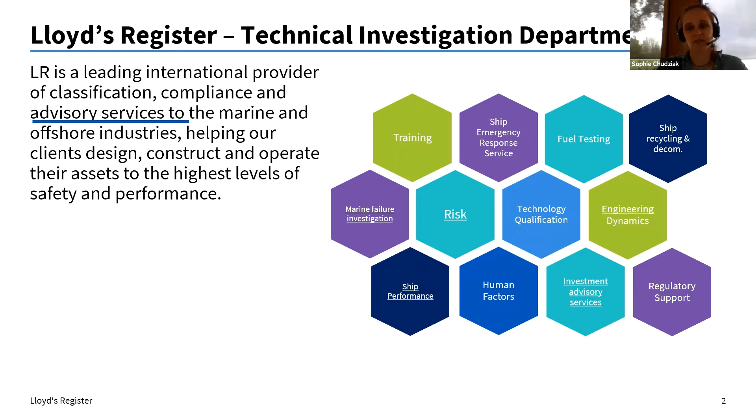I'd just like to introduce the department I work in. Most of our work is dedicated to advisory services, which covers a wide range of fields and competencies. Some of them are underlined here. It includes failure investigation, risk assessment, naval architecture analysis, ship performance assessment, and others.

Tonight, I will first walk you through the overall project. I will show you the equipment installation on the shaft line, some of the post-processing steps that we carried out, and the results we got. I will talk a bit about the health and safety challenges we encountered, and finally, some overall challenges during this project. I would like to add a small disclaimer that I'm not an expert. My aim is to share a project I was involved with, and I found really exciting and interesting, so I hope you'll find it too.

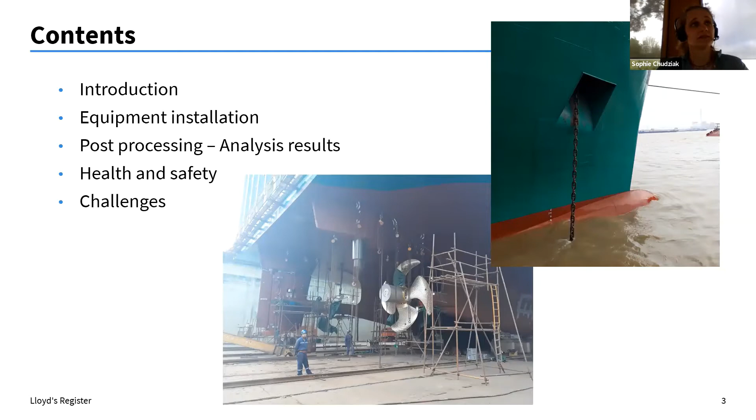So let's dive into the actual project. 2 RoRo vessels were being built in China for trade in Australia and Tasmania. The ships were about 200 meters long and 30 meters wide. They are twin screw vessels fitted with 2 conventional shafts, each driving a 4-bladed controllable pitch propeller. On each shaft line, a direct drive 2-stroke engine was fitted, and there was also a shaft generator.

A numerical analysis carried out by the shaft line designer suggested elevated moment and forces at the propeller, hydrodynamic moment and forces. As this was a new design and the only dry dock suitable for these vessels was quite far away, any failure would have been very costly for the owners. So they decided they wanted to carry out in situ measurements to de-risk the operation of these vessels. Therefore, TID was contracted to measure the propulsion dynamic forces.

They started the project and planning began to take place, which was coordinated by a TID senior engineer. We were actually contracted by the shipyard rather than the owner. And there were two sisters in the series. TID attended both vessels for static shaft line measurement, and we conducted dynamic measurement on the first ship of class. I will only present tonight the dynamic measurement aspect.

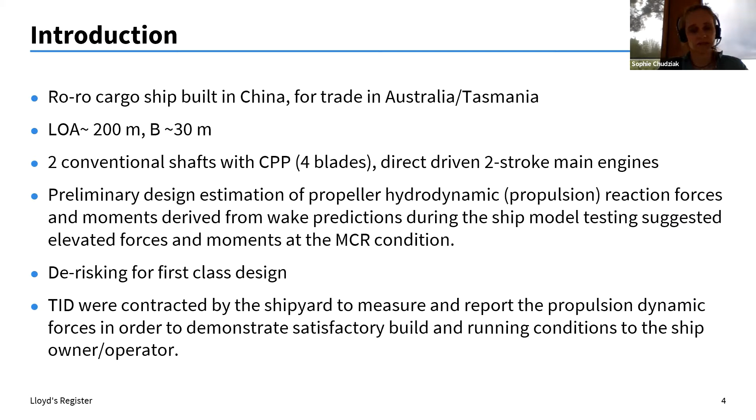As you may imagine, this was quite a complex project that required a lot of coordination and involvement of a number of colleagues. Originally, the project was won through TID Asia. We had an office in Shanghai. Two hydrodynamic specialists from TID carried out some numerical analysis and modeling.

A senior engineer wrote the proposal for the on-site attendance. Another senior engineer was the overall project coordinator. The technical lead carried out most of the analysis and was also involved in the installation, led the installation.

Two instrumentation specialists tested the equipment in our laboratory in Southampton, tested, prepared, and looked after the logistics. Another instrumentation specialist looked after the underwater telemetry and also the on-site installation of that part.

Two engineers carried out some other part of the on-site installation, the data collection during the sea trials, and some of the analysis after the trials. We also had support from administration, from TID in the UK and in Asia, the finance people, some local surveyors that would help us with the shipyard, and other people that I would forget to mention, probably.

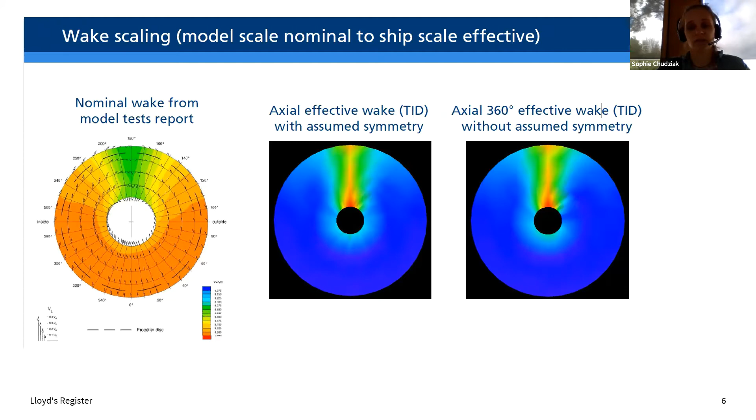I'm going to show you a basic overview of the installation and then go into more detail. We installed strain gauges to assess propeller shaft bending and shear strain adjacent to the propeller flange. This would then be used to derive the propeller hydrodynamic moments and forces. The underwater telemetry was fitted under the rope guard, and the battery pack was dormant for 3 months underwater, and it was then turned on before the sea trials.

Proximity transducers were built in the stern tubes, 4 at the aft end of the aft stern tube bearing, another 4 at the forward end of the aft stern tube bearing, 2 forward and 2 aft of the forward stern tube bearing, so that would be 12 in total, monitoring the radial displacement of the shaft in all conditions.

Inboard, we installed strain gauges to measure bending strain in the inboard spans between the bearings. We also measured the torsional shear strain and axial strain to derive torque and thrust. We measured the axial displacement at the main engine output flange. We also measured the rudder angle, the pitch of the propeller blade, the shaft RPM.

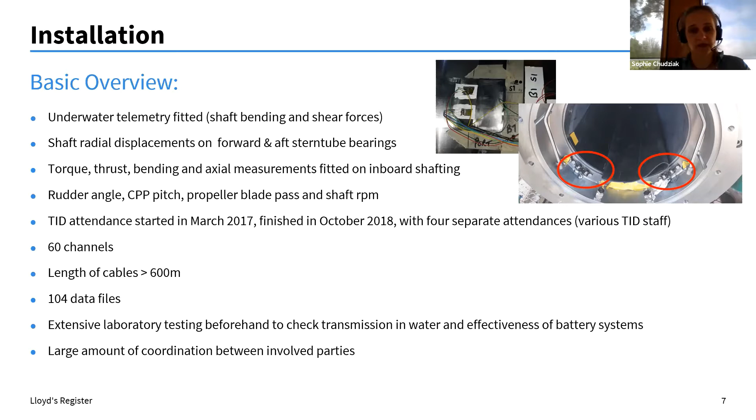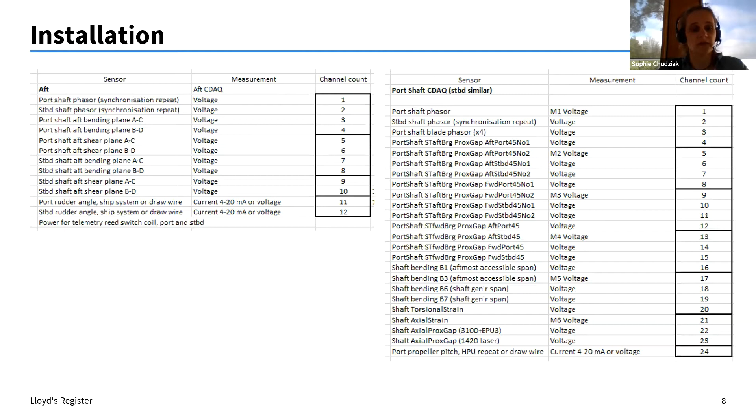This is a list of the channels that were being monitored. We instrumented both port and starboard shafts. The installation was identical. On the left are the channels that were installed, came back to the steering gear compartment. 12 channels coming back there. And we had 24 channels on port side, 24 channels on starboard side that were all brought into a National Instruments data acquisition chassis.

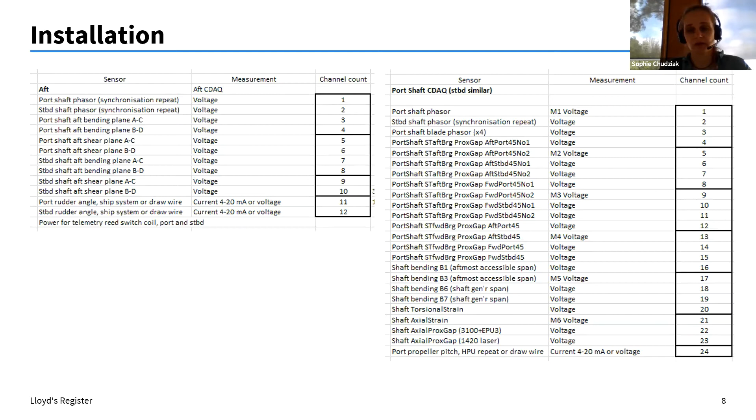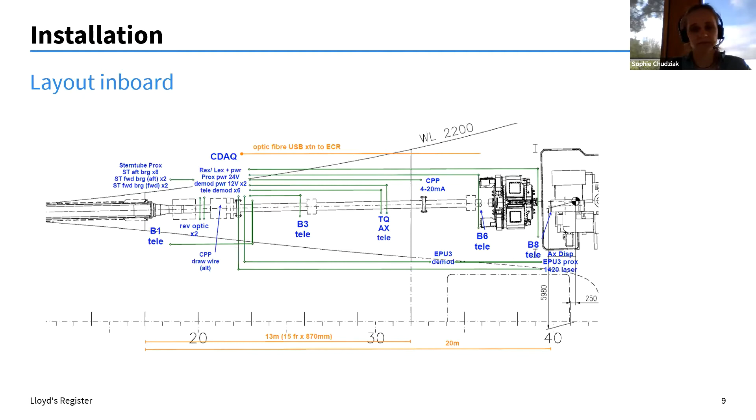This is the layout for the whole installation. Identical port and starboard, some channels in the steering gear compartment, and they were all synchronized with each other and brought back to a data acquisition laptop located by the engine control room.

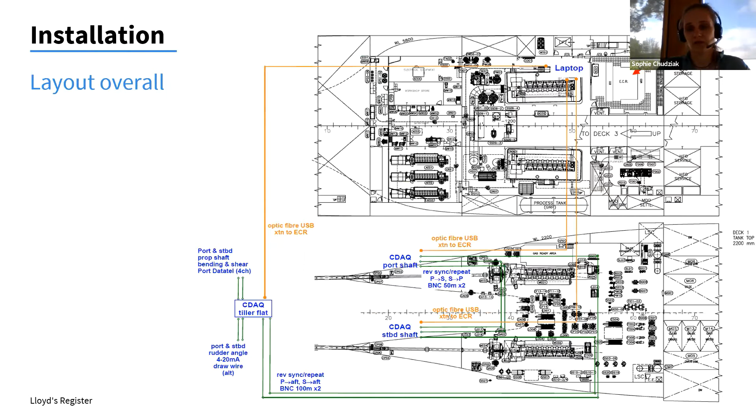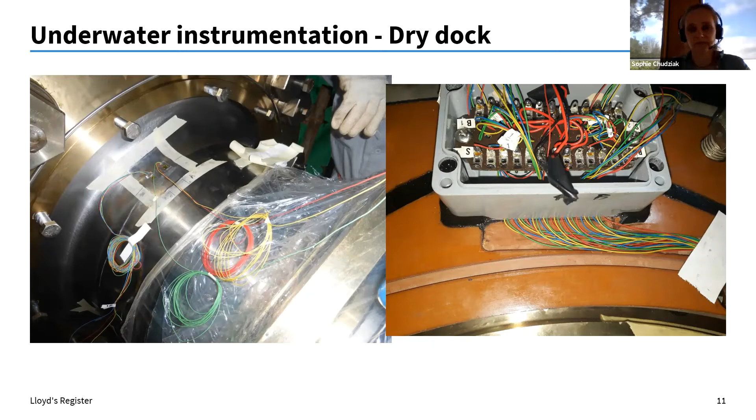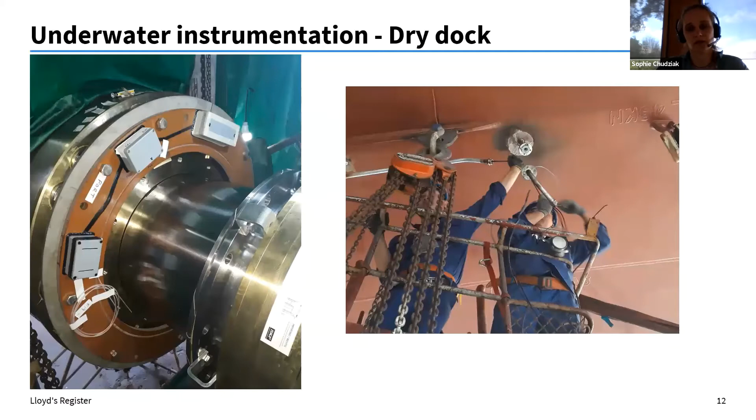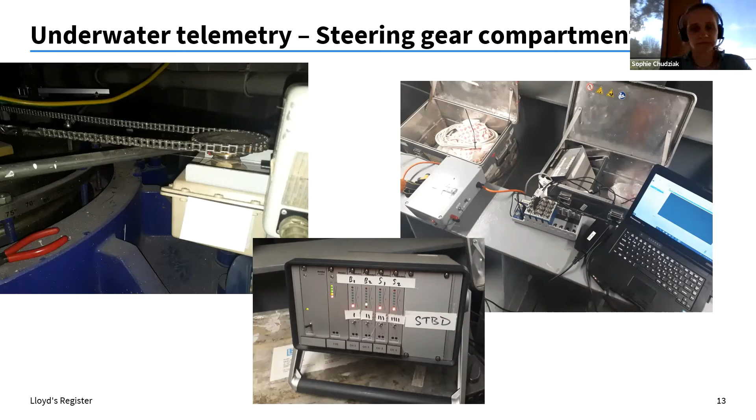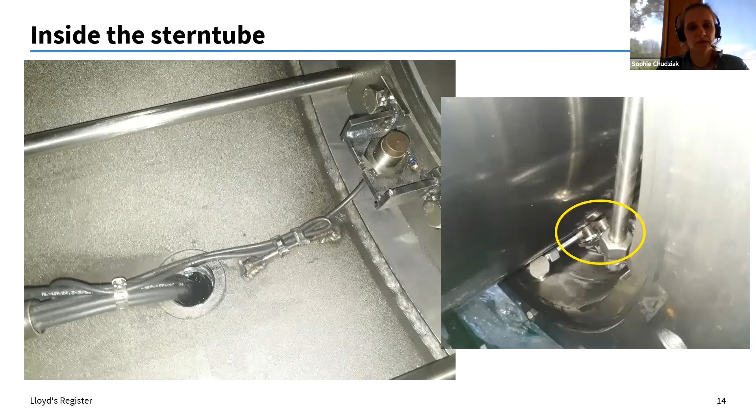We used different types of telemetry, so either Astech or Datatel. On the left is the finished installation with the telemetry for the thrust and the torque, all tied to the shaft. The right picture shows one of the proximity probes to measure axial and radial displacement at the stern seal. The brackets were made by TID in advance.

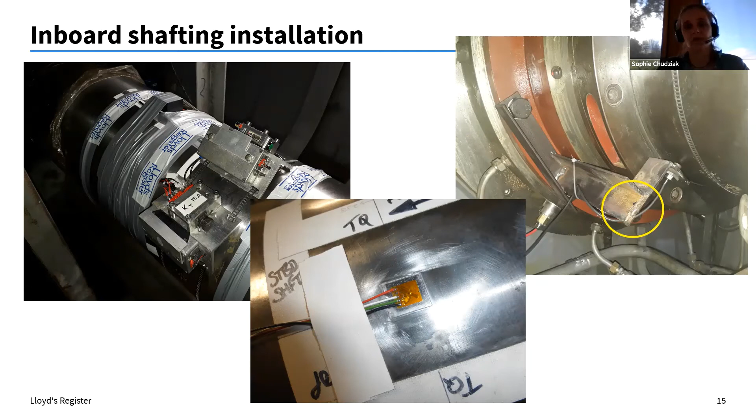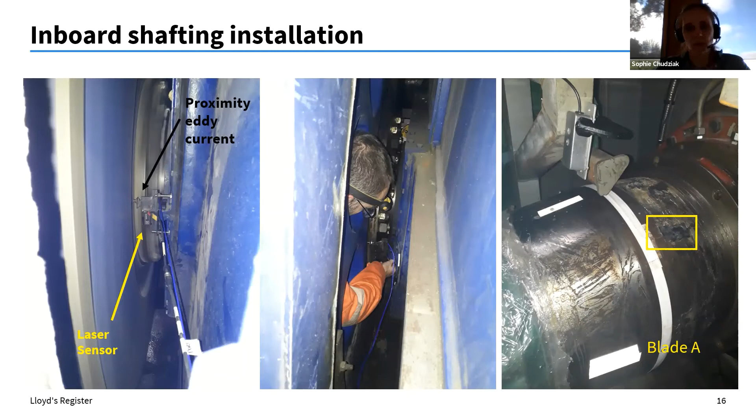To measure the propeller pitch, we used the 4-20 milliamp current card hardwired into the local control unit. At some point, we had to prepare for cable routing between the different compartments and back to the engine control room. So we had to go through the different watertight hatches and watertight doors, make sure we could leave them open, in collaboration with the shipyard, see which ones could be left open, which ones couldn't, and how to make them safe enough.

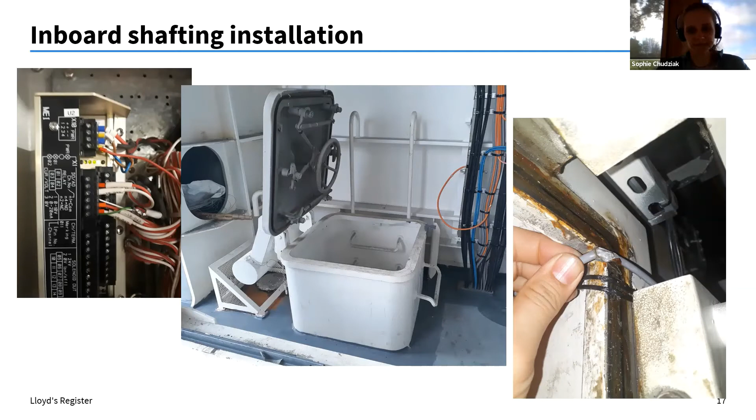Once we'd finished all of that and the ship was ready to go on sea trials, we went along. We didn't have any dedicated sea trials for our measurements, so we went along during the acceptance sea trials. There were 2 of us, which would help for communication. So one of us would be in the bridge to make sure we didn't miss any opportunity to record, and one of us would be by the engine control room to check that everything was working, to start and stop the recording, and also running to the tiller flat to turn on and off the inductive power.

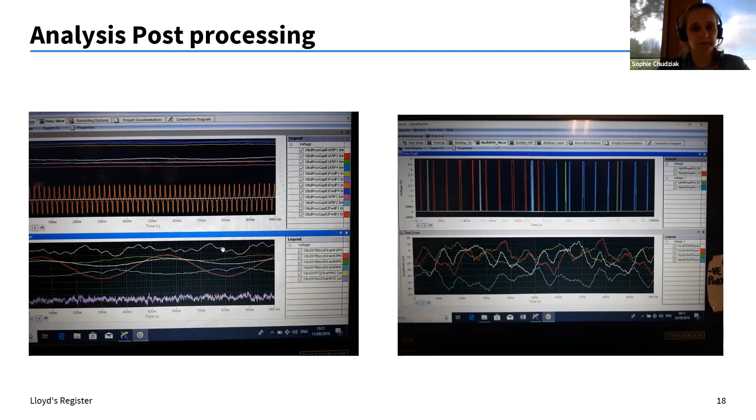So the different sea trials during which we measured: the speed run up and run down in about 5 RPM steps. During the maneuvering, 360 degrees turning circles and various rudder angle zigzag. We measured during the astern trials and also during the EEDI trials.

We use MATLAB and in-house script to carry out the post-processing. We mostly worked out the mean values of the different values that we get and the vibratory components. We compared with predictions and also against any standards or any limiting values that we know of. We looked at the order analysis and at the shaft orbit plots. I will show you some results only for the run-ups, but the principle is the same for all the different trials that we analyzed.

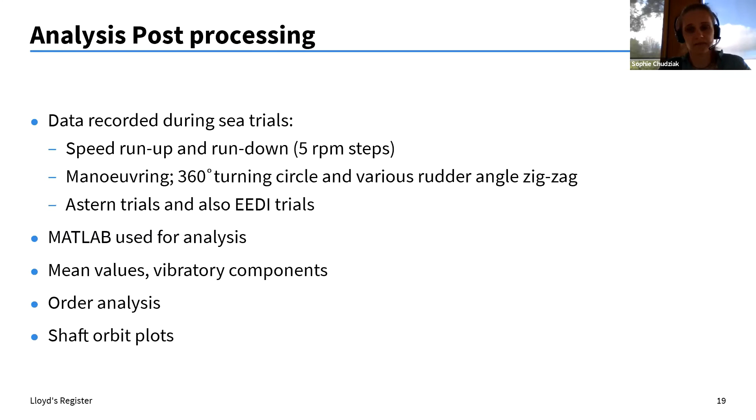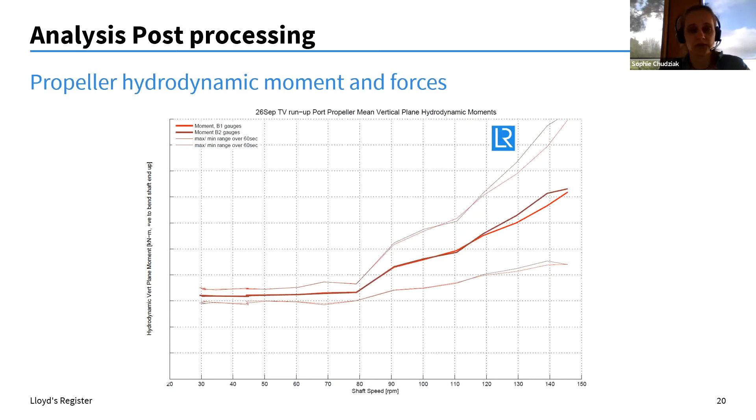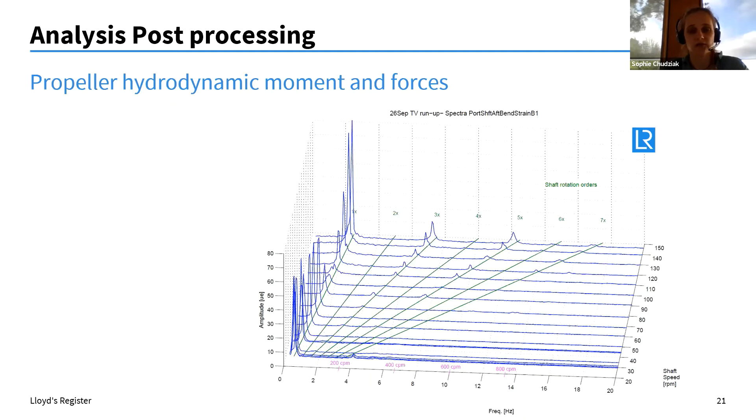We also looked at the vibratory aspect. So this is a waterfall plot for the bending strain. It was a 4-blade propeller, so you can see the 3rd and 5th order as the blade rate vibration is modulated by the shaft rotation rate. And it's useful to check if there is any resonance or forced vibration.

From the bending strain measurements in the inboard spans between each bearing, we can work out the bearing loads, bearing reaction force. So with the measured value along with the model that we make with our software, it's called MASAC, we can work out the bearing reaction. We assume a single point of support, and we can also derive the maximum nominal pressure due to the loading. And we check that against Lloyd's Register limits. So in this case, it was all within the limits.

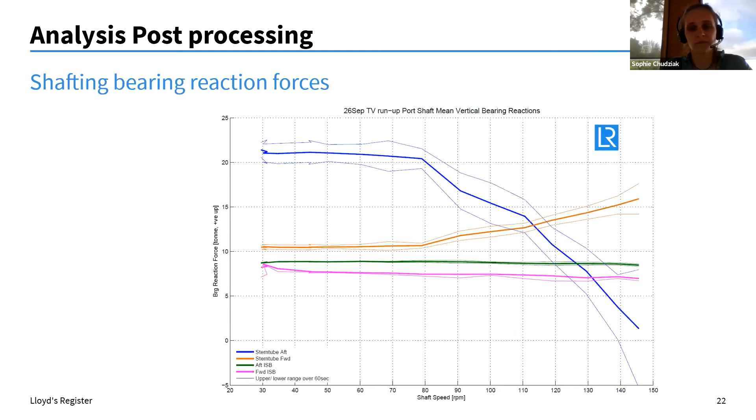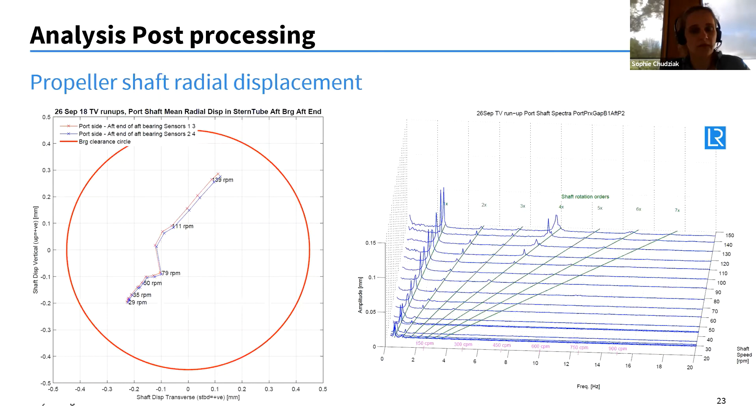On the right is the waterfall plot for a similar measurement. The first shaft order is due to a run out or slight imbalance of the shaft. And we could work out that the radial displacement of the port and starboard propeller shafts were satisfactory. So the previous picture showed the mean values, and we also looked at the maximum single amplitude values for all the sensors.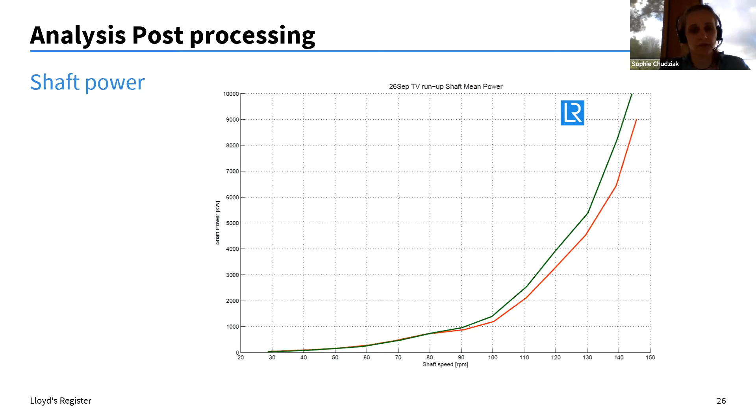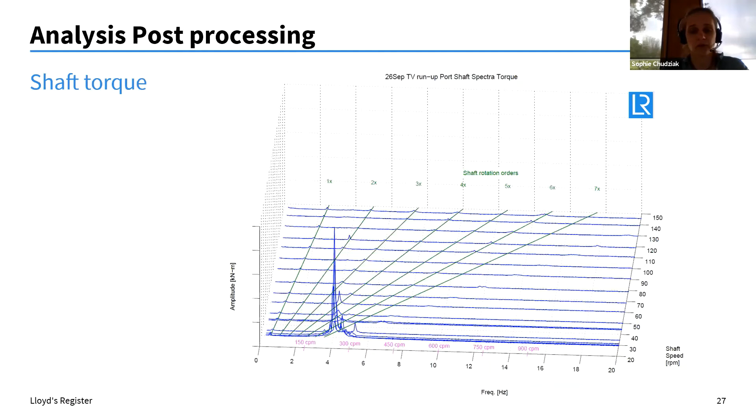During the run-ups, we also analyzed the vibration component. So this is the torque, the waterfall plot for the shaft torque. And we can see a peak at a frequency of about 4.1 Hertz, which is likely to be a resonance of the first mode natural frequency of the shaft.

And on the next slide, we can calculate the torsional shear stress and compare it against the Lloyd's Register limit for continuous operation. So the limit is the dotted line, and the calculated values from our measurements are the red and green lines. So on the left, you can see that it's going above the limit, which is the peak that we saw on the waterfall plot before. That confirms the design barred speed range of between about 22 and 32 RPM.

The conclusion from the measurements was that there were no elevated bearing loads in operation. The propeller shaft radial displacement was not exceeding any restriction. There was no undue vibration, and we confirmed the design barred speed range. All during the run-up, the run-down, and during the different maneuvers.

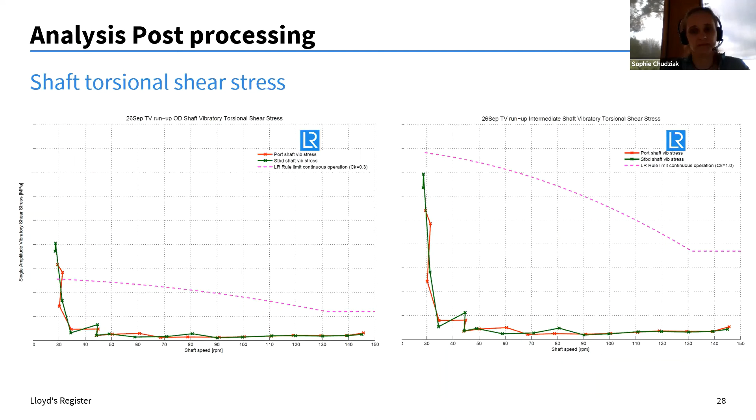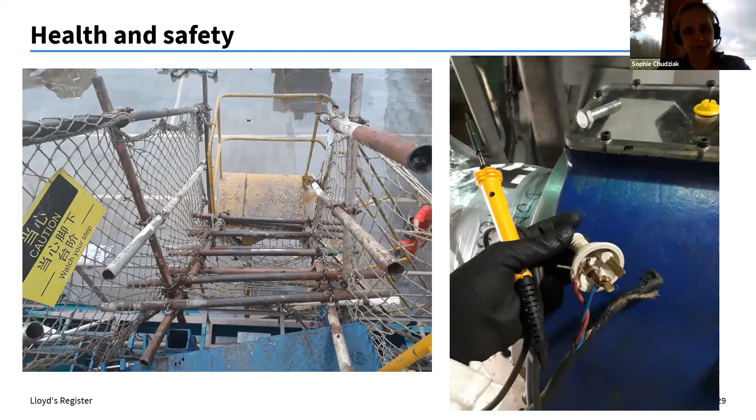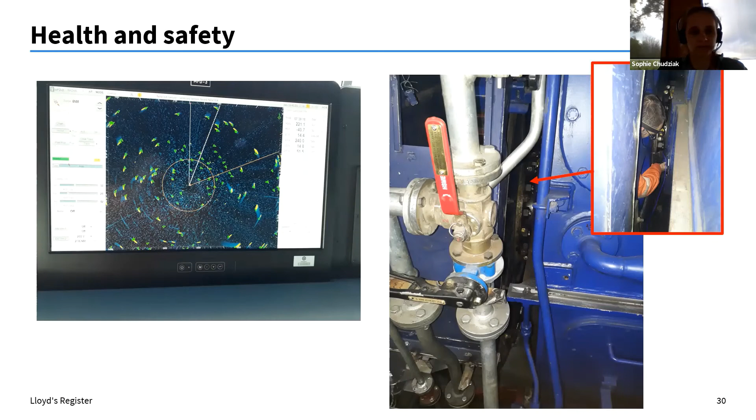Some challenges and lessons that I certainly learned from this project. As I mentioned, we were contracted by the shipyard, but it's the owner that required these measurements to be taken. The ship was at the end of construction, where it's quite busy for the shipyard, so they didn't always want us there. We were interfering with their work. There was a lot of concurrent work between us and the shipyard. We had some issues where some of our electrical equipment would be unplugged whilst we were working.

Coming back after one attendance, we found out that our equipment had been pressure washed. Luckily, that didn't affect the installation. We experienced a blackout during the installation, which is always helpful. So to mitigate and work better, we sometimes worked at night when it was quieter. Some of the channels, especially the proximity probes in the stern tube bearing, didn't work when we came back. We don't really know why. Maybe some wires were damaged when the shaft was installed, so it's a good thing that we had the redundancy, so we didn't lose out in the end.